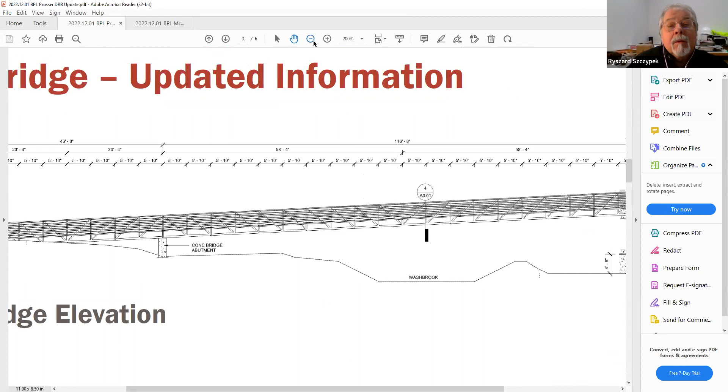They also asked about the bridge details. Let me go back to that previous slide.

One of the items that was asked for by the Inland Wetlands Commission was changing the topography of this area. According to the town engineer, they wanted to make sure we had two flood issues addressed. One is staying out of the floodway, defined by these heavy dotted lines — this is the western side, this is the eastern side. So we weren't having any obstructions here, but the town engineer also said our engineers needed to do an evaluation on flow.

So what they asked us to do is reconsider the topography that we had here. We were raising this side of the Riley parcel in order to minimize the ramp length, but because of their requirement to lower this topography, we have to extend the ramp length. So our strategy now is to bring this footbridge down to approximately here, where you can then continue either down a set of steps or a lower ramp, which would be handicapped accessible. The whole ramp is handicapped accessible, but because we need to make the transition from this previous elevation down to a lower elevation, we need to extend or provide this access ramp to the bottom of the footbridge.

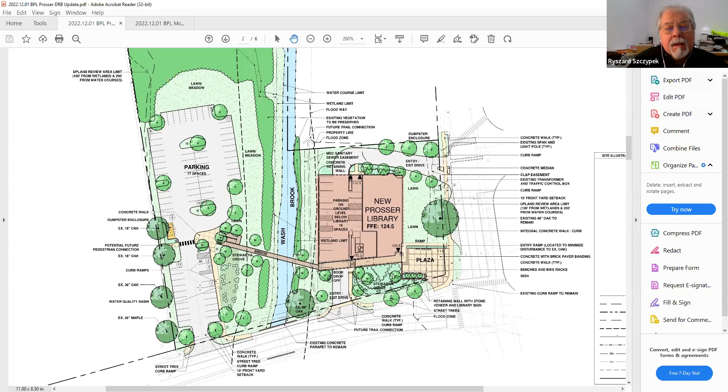Other questions asked by the design review board and also by wetlands were: what does this bridge look like? How is it built? So we've now included some details in this presentation. At the eastern end, where the bridge connects to the porch, that's the first floor elevation, then a gradual slope down to this location, and then the revised topography here, which we'll have to correct in a subsequent revision, and the access ramp on the other side of this footbridge.

We're introducing a concrete bridge abutment approximately here, which would be outside of the floodway. But what it does is reduce this span. Previously, we were spanning all the way from the building to the toe of the bridge without any support at all, which affects the cost. If we introduce a support at some point that does not occur in the floodway, that actually reduces the amount of structure required for the overall span.

So we've introduced that. The construction of this bridge is basically a steel structure, with railings on the side — steel members that will function as a balustrade on each side. The surface material is detailed as ipe planking, interspersed with some metal slip-resistant strips. So that's basically the details of that.

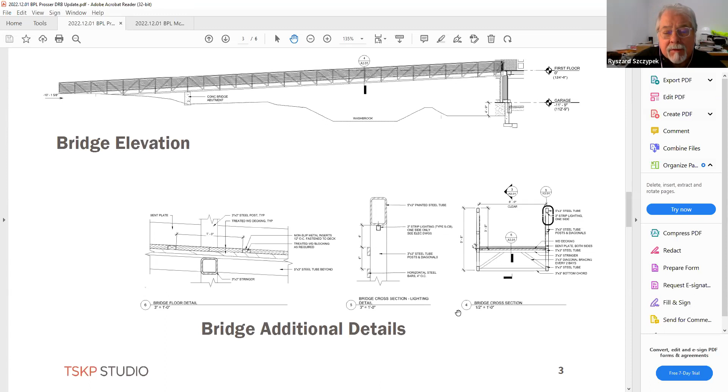It's important for bidders on the Prosser building, particularly the roofing subcontractor, to be aware that photovoltaic panels will eventually be on the roof, and that a coordination meeting is needed between the roofing subcontractor and the PPA vendor to ensure that any roof penetrations for conduit comply with the roofing manufacturer's and installer's systems. We don't want the roofing membrane warranty to be voided by the photovoltaic installation.

As soon as a PPA vendor is identified, we'd like to have coordination discussions with them to develop this further. But for bidding purposes, we want to put a note on our drawings saying this is a preliminary array, so roofing and structural contractors are aware the final layout may be adjusted depending on who the PPA vendor is.

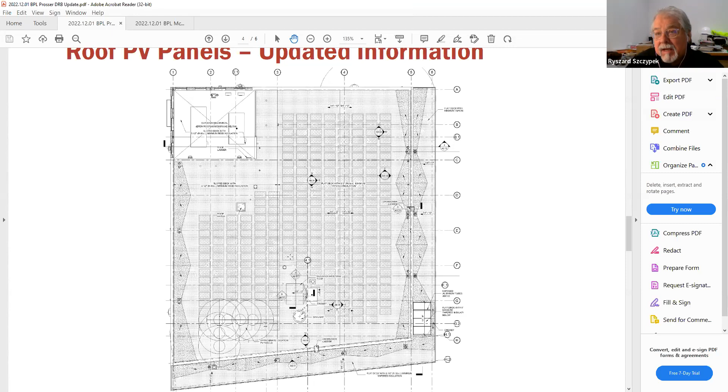This explains to the design review board where the photovoltaics will be placed. It'll be very low profile, and as far as we can tell, won't be visible from the surrounding areas.

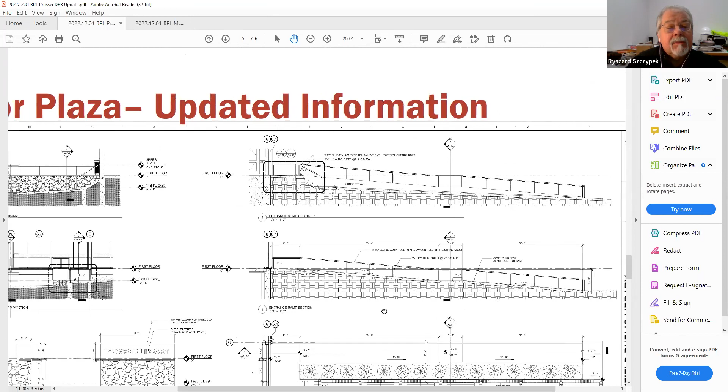We're also showing the ramp. This will have a similar lighting detail in the rail of that ramp to illuminate the incline walkway.

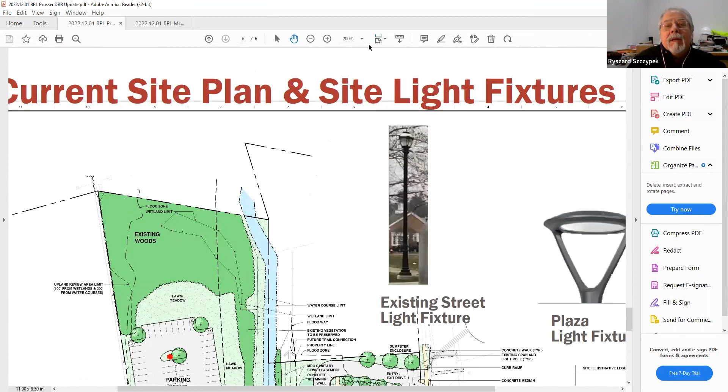People on the design review board couldn't comment on lighting because we didn't show them any lighting. So we're going to provide this diagram showing where the light fixtures will go and what they'll look like.

We need to illuminate the parking lot on the Riley site, and the walkway that leads from Mountain Avenue into the parking area. That area is also the entrance into the vestibule at the lowest level. We also need to illuminate the plaza in front, so there are some light fixtures and light poles proposed here.

We have these kinds of fixtures on poles located here, and light fixtures located on bollards. These are low bollards, maybe 36 or 42 inches high, to illuminate the walkway leading to the building. We also have taller poles to illuminate the parking lot, and these are what those parking lot light fixtures look like.

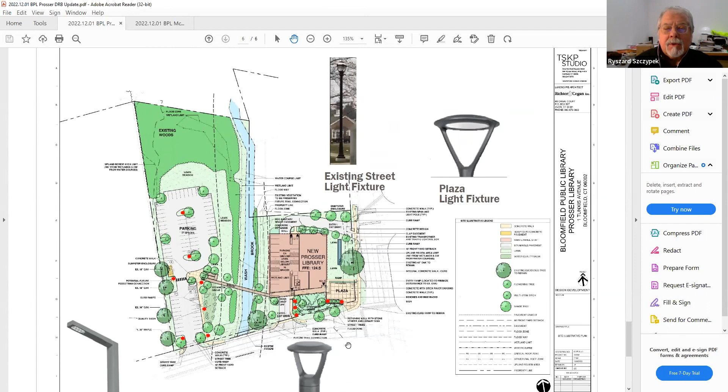When we were having conversations with the town engineer, he mentioned they're doing light fixtures in other areas of town, such as the town green and the streets alongside it. There happens to be a light pole located near the northeast corner of the Prosser site, and here's what it looks like—a much more traditional appearance. He asked if, as part of this project, that light fixture could be replaced.

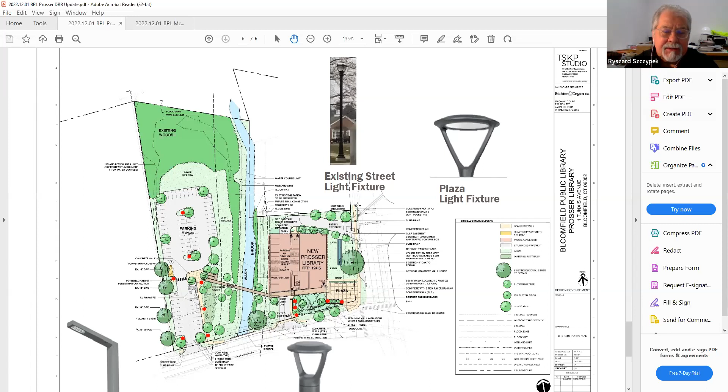I don't see why not. The light fixtures are actually furnished by Eversource—it's an item they stock and also service or maintain. The cost of that pole will actually be borne as part of the utility cost that the town regularly pays to Eversource.

I believe this might be the last slide. Any questions? Questions for Ryszard?

Lois asks: Ryszard, can you describe how kids will be prevented from falling off the bridge as they cross it?

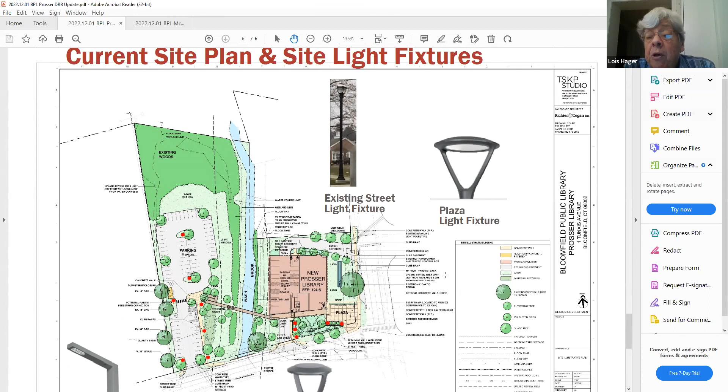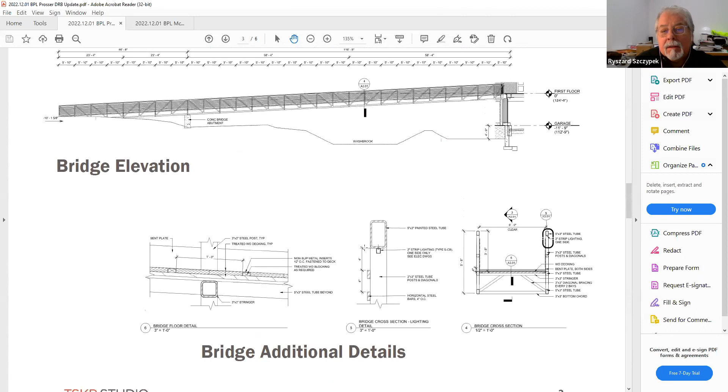Sure. The railing, I believe, is 42 inches high, or maybe even 48 inches. Let me go back—there's a dimension here. If I zoom in, there's a dimension of 3 feet 8 inches, which is 44 inches, sufficient to keep children on the bridge.

In the space on both sides, spanning from vertical strut to vertical strut, there would be a balustrade—horizontal bars installed 4 inches on center. So it's a very narrow opening, much smaller than a child's head could possibly fit through.

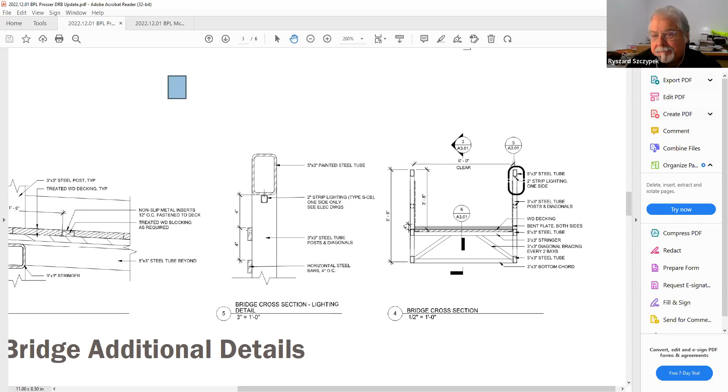I guess so. Okay, Patrick. Thank you, Mr. Chair. Thank you for this, Ryszard.

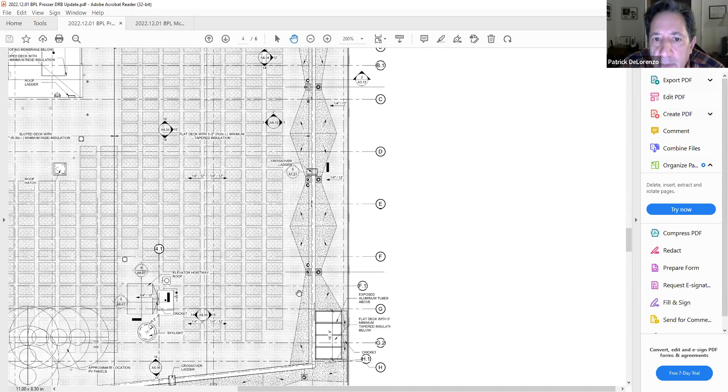I was wondering if there was discussion about the fixtures currently on the town green, and the consistency between the town green, Filley Park, and the library. They should all really be the same light fixtures. So that existing post there, is that the same light fixture that's in the town green and at Filley Park? I personally did not inspect the light fixtures on the town green, but according to the town engineer, Jonathan Tisi, this is the fixture that was used. Yeah, I mean, it does look like it.

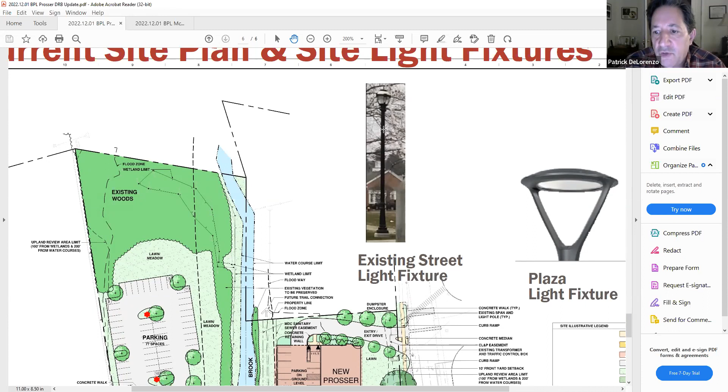So are you saying those are the fixtures that would be used, or are these other light fixtures what we're proposing on our plans and specs? This particular fixture, there's a light pole here, the street light that Jonathan Tisi would like us to have replaced and maybe make part of the project. That was the extent of the conversation regarding this style of light. So the design review board hasn't discussed the light fixtures yet? No, they want to know more about what we were proposing, so that's why I'm bringing this to tomorrow's design review board meeting.

Again, I don't want to belabor this, but we really shouldn't be using different light fixtures than the ones on the town green and Filley Park, which are all relatively new. We shouldn't be using a different set of fixtures here. So I would strongly suggest that the design review committee know that the lights being proposed are not the same.

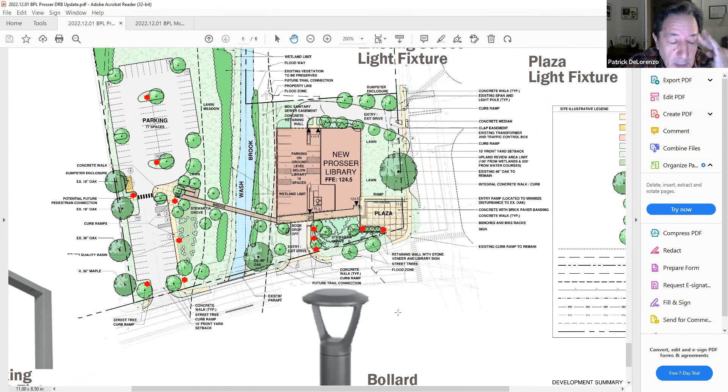I know next to nothing about this existing street light in terms of lamp efficiency and photometrics. Now, I could understand the bollards being a separate fixture because they're closer to the ground, providing lighting for the walkways. But the plaza lights and the parking lights, maybe the parking lights need to be brighter than these fixtures allow. I don't know that, but I just don't want to see different light fixtures all over the town center.

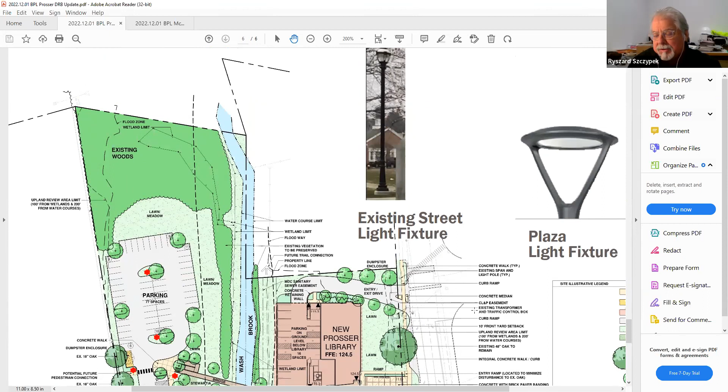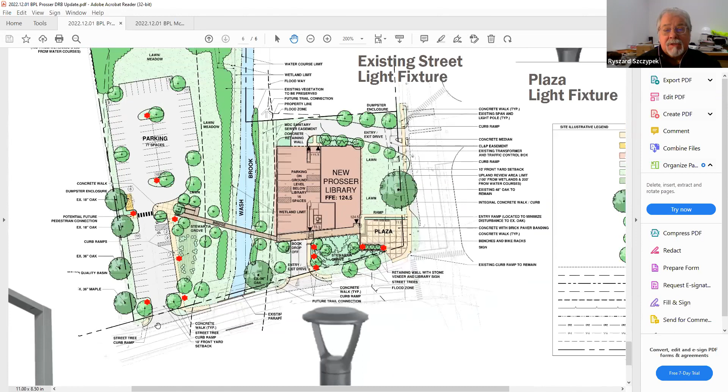This will be a subject of review not only at the design review board tomorrow, but also at the planning and zoning meeting. Planning and zoning requires a photometric analysis of light on the surface of the site, as well as any light spillage across the property line. They require that there's no light spillage. These fixtures we're proposing, which we've used most recently on a project in Mansfield, have full cutoff and do not have light spillage. We've used them before, and we're in the process of getting a photometric analysis to demonstrate that to planning and zoning.

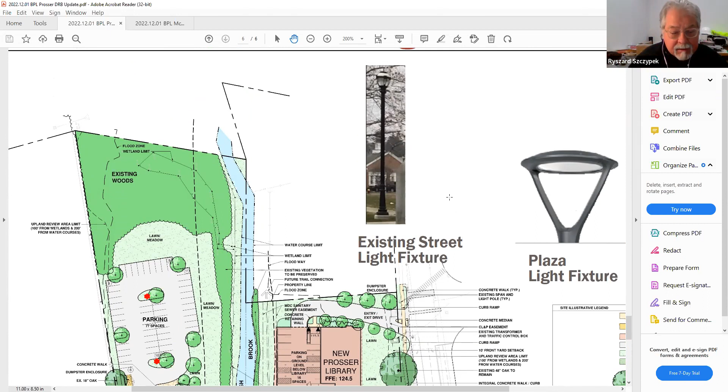I don't know about this existing streetlight. Maybe you can get that information from Jonathan. I did ask for that more technical information.

My other question is about right below that existing light fixture, right by the Prosser on the corner, there's that entry exit drive which currently exists today. However, it's only an exit, there's no entry into that drive, it's only exiting either left or right. Is this proposing that this be an entry drive now? I don't know how that would work with all of the intersections there.

It will be entry and exit. Is there going to be a traffic light that will guide that, because there are multiple intersections there? I don't know how somebody would be able to turn left to enter without a light. They will not be allowed to turn left. This is an exit that's right turn only. This was part of the traffic study done and the report submitted to planning and zoning. The recommendation for this location is entrance only in this direction and exit right turn only, so it's a two-way drive.

So the entry would only be from the right? That's correct. And the exit would be from the right? That's correct. Okay, well, that I could understand, because I know right now it's a do not enter, there's no entry into that, there's only an exit. That's good, because I was never in favor of having a driver be able to turn left out of that driveway.

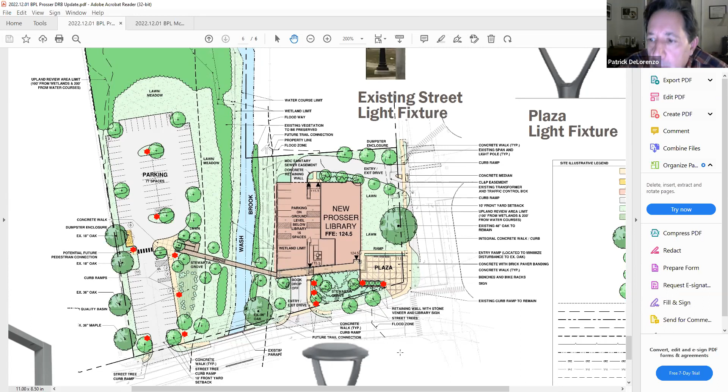Last thing, maybe you already mentioned this, but is the bridge going to have the ice warmer thing on it? So we want to discuss that. I think one of the items on Downs's agenda is alternates, and the heating element in the bridge could be designed as an alternate. If the committee wishes to get that design finished and priced, we can certainly do that.

And Downs can add it as an alternate. Okay, yeah, I thought it was on the alternate. Okay, thank you so much, I really appreciate it. You know, Patrick, I'm with you on your comments on the light fixtures.

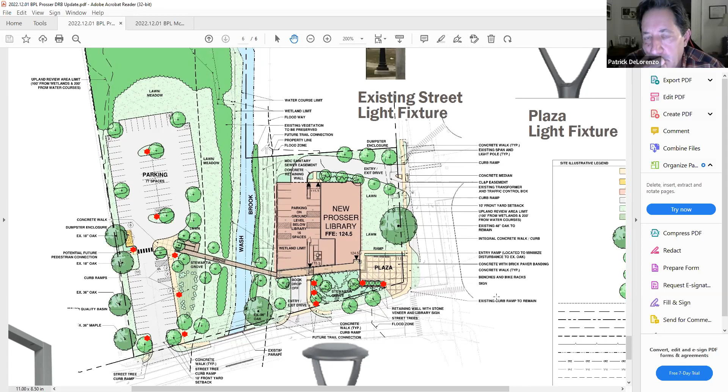But the other factor is that those existing street fixtures at the town green spill a tremendous amount of light out. They do. And so one of the criteria we're trying to do here in general is dark sky, don't spill light up into the sky. Right. So I don't have the answer, because I agree it'd be nice to be uniform.

Maybe, but maybe we break out the parking area as different and keep lights closer to the building as something more similar. I don't know what the answer is. I think we've already taken quite a bold step in making the building different.

So maybe there's some justification in keeping it consistent with the building. I'm just throwing out ideas, but I think the point is well taken, and it sounds like Ryszard's going to be looking into that some more. So I think it's unanswered.

Okay, good, because I know a lot of thought and time has gone into both the town green and the area directly in front of the town hall. I know they're not finished with the town green, and a lot of that was what was available from Eversource also, because they provided those poles and lights.

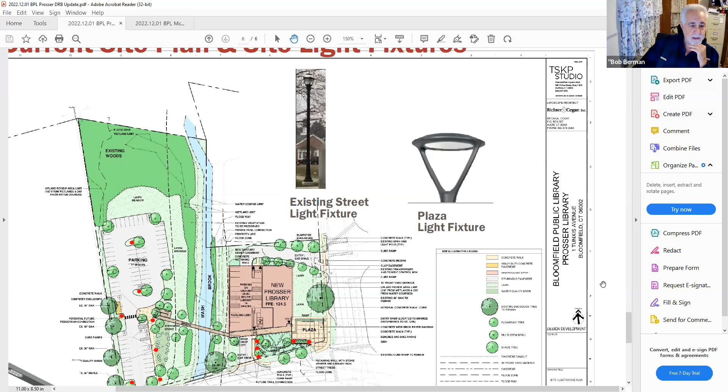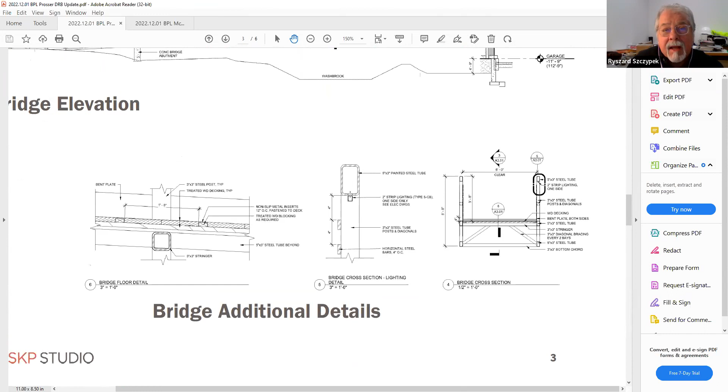And how would they get at that? Underneath, from the top? Yeah, so you'd get at it from underneath. The beauty of that kind of fixture is that it's exposed, not concealed - it's right there, but tiny. And the light source is within that fixture, you don't even see the bulb.

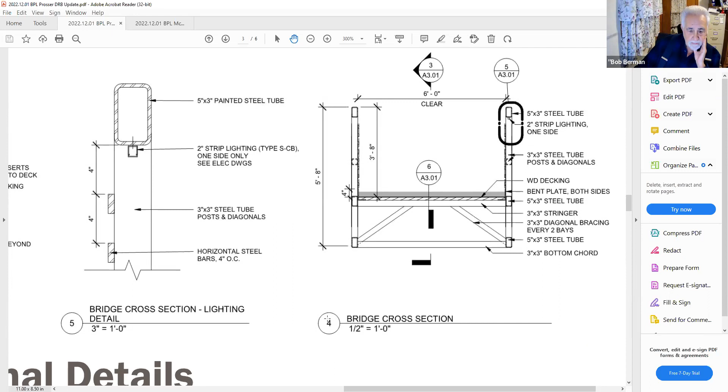And the light spills out and down, so it shines directly over the walking surface, but this is located right there within easy reach. Oh, okay, all right, so you get at it from the top. Yeah, that's what I was trying to figure out. All right, other questions for Richard?

Elizabeth? I had two questions. One might be more for the chair, and it's more procedural: when the design review board makes recommendations, are TSKP bound by them, or how does that process work? No, they are not bound by them. In fact, planning and zoning is not bound by the suggestions of the design review board either. They are merely suggestions.

So how does that work between TSKP's recommendations and the design review board's recommendations? Well, it just sounds like a lot of what the design review board suggested, Richard has made those adjustments, and I was wondering about that. I mean, we've given, in general, our architect license to design.

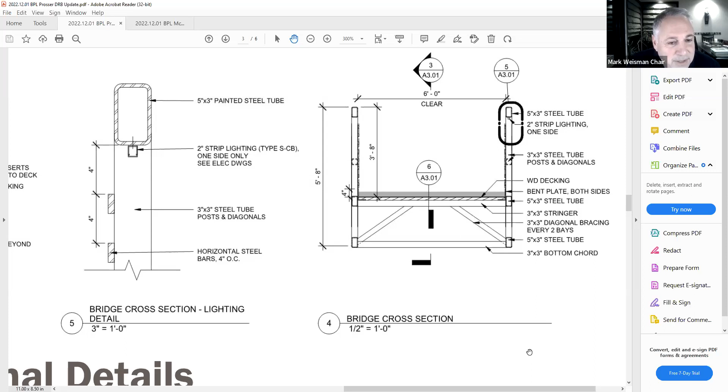So obviously he has taken the suggestions to heart in many cases here and gone along with them. And in other cases has not. Okay, so I wanted to make sure, that's what I thought.

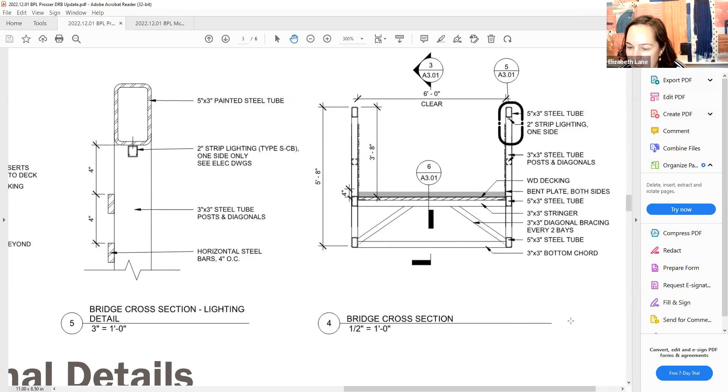I just wanted to verify that the architects are still taking artistic license when needed with those recommendations. And then my next question was about where will it say Prosser Library, and will those signs be lit? It would be ideal if, if it was up to me, it would be massively huge so that everybody knew. But I'm just curious where that will be and what look that will have.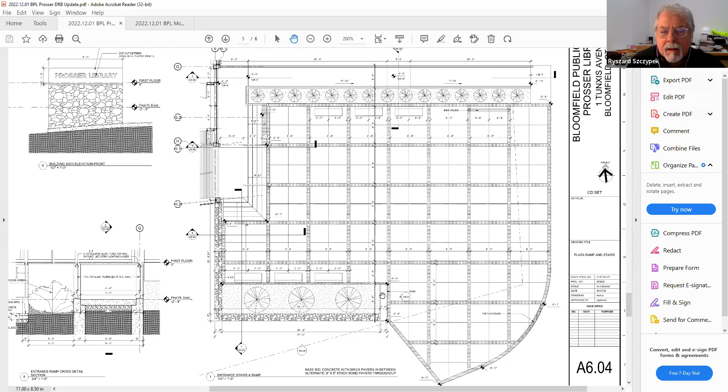I can show you, and I'm glad you brought it up. So here again is a view of the plaza at the entryway. There's an element located right here. Oh, and by the way, there are benches located here for the design review board's suggestion. There's an element located right here on the left side of the plaza as you approach the building. And what we're proposing is, there's also a retaining wall here because the slope of the site slopes down.

So we're trying to create a level surface. It'll be pitched to drain, but a fairly level surface for the plaza. And then a wall here. We're proposing a stone wall. We're proposing that this element, which is the end of the retaining wall, be also a stone structure, as you can see here. And on top of the stone structure is an illuminated item.

And it says Prosser Library on it. This element on top is about 12 inches high. The letters are probably about 8 inches high, and this is an 8-foot long signage element.

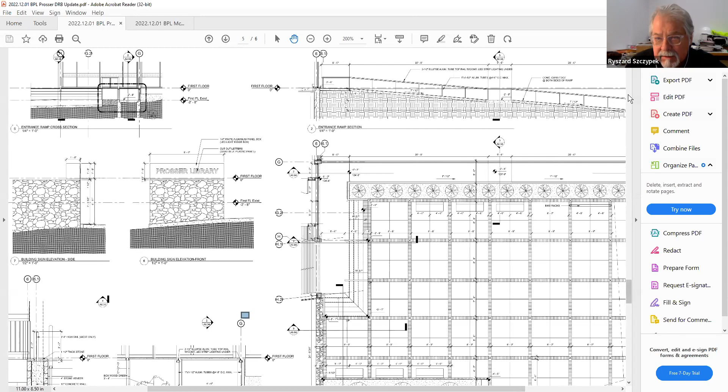And what direction does that face? It faces Tunxis Avenue. It could be illuminated on both sides, so that it could also face people who are approaching toward the east on Mountain Avenue. So that element is right here. I see, so it could be viewed from Mountain Avenue, and it could be viewed from Tunxis. It could also be viewed from Park. Yeah, that would be great if it could be seen from both sides.

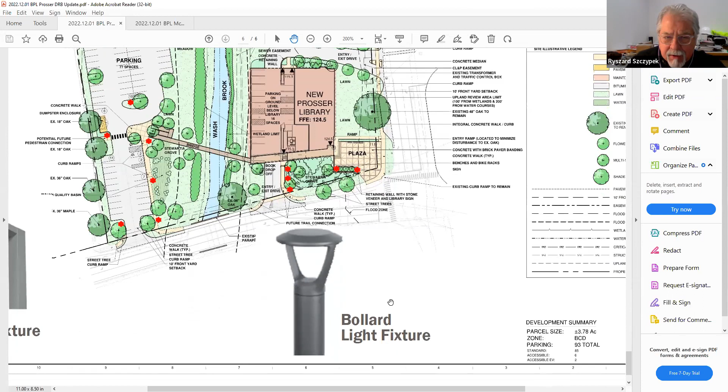Richard, is that similar to the earlier renderings? Even pre-referendum renderings had indicated a sign in that area. Do you recall, is this oriented basically the way it was shown there? I'm trying to remember. I believe so, I don't have those graphics here on my screen, but I think it was generally in that area. I believe that's correct.

I also have what we're proposing to show for McMahon, although I don't think it's on their agenda. I can share that with the committee if the committee wishes. Yeah, I mean, this is the first time we're really seeing this.

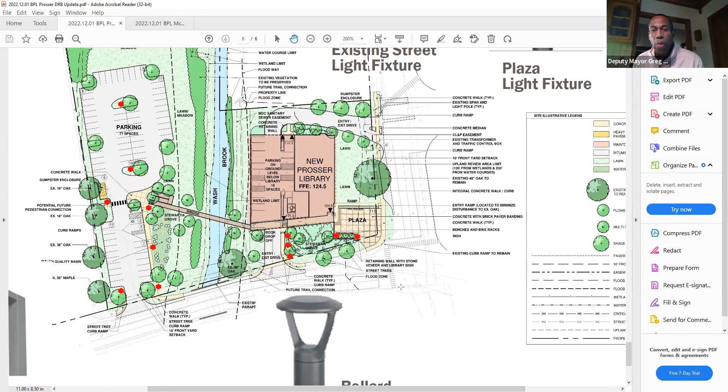Deputy Mayor Davis? Yeah, thank you. Richard, I wanted to ask, was there any thought to having illuminated signage on the inside the building up high so that you can see it when driving by and you can see it from blocks away? Like the Hartford Public Library downtown's got the HPL up high, it's really attractive and you can see it from all directions pretty much. Honestly, this is an element that Taisu designed, and I don't think he considered a sign at the top of the building, honestly. It wasn't in his vision. Yeah, okay, thanks.

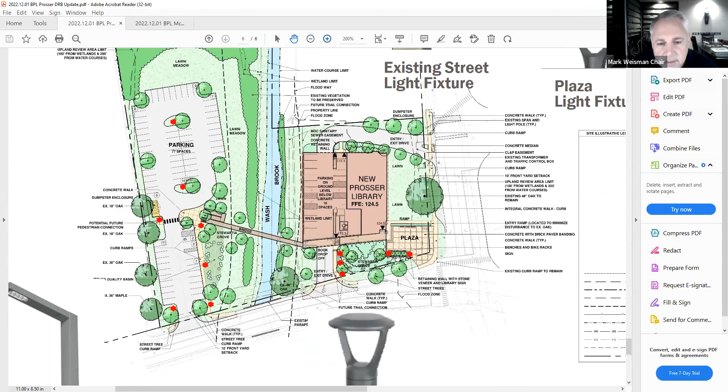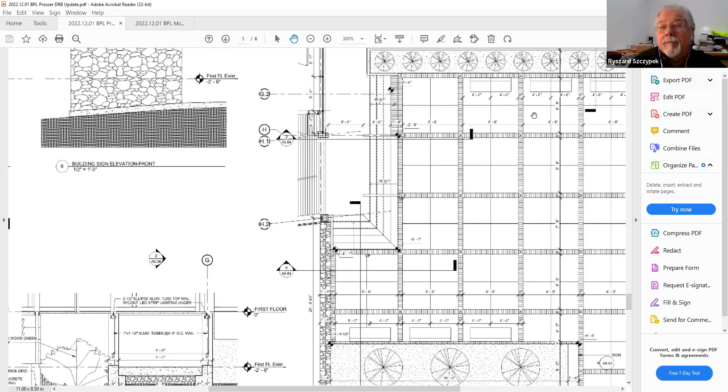Let's see, don't see any more hands. Richard, I see you pointed out some benches on the south side of the plaza. I see more benches on the north side of the plaza as well, is that correct? Yeah, let me see if I can get there. I see some lines there that look like the same as more benches there. Oh yes, right, right here. Okay, so we have a row of benches on that side as well. And then the species of trees looks like they've changed.

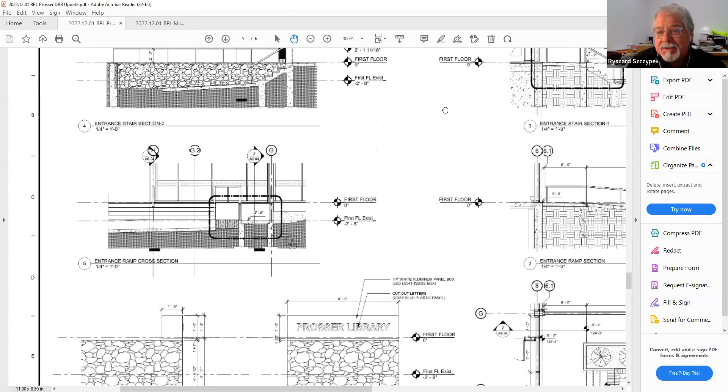Yes, so there were recommendations made by, I can't remember, Design Review Board or by Wetlands, or both. But yes, Richter and Cegan has listened, they have made those adjustments in the species of the proposed trees. Yeah, Stewartia Grove, is that what that says there, below to the south of the building?

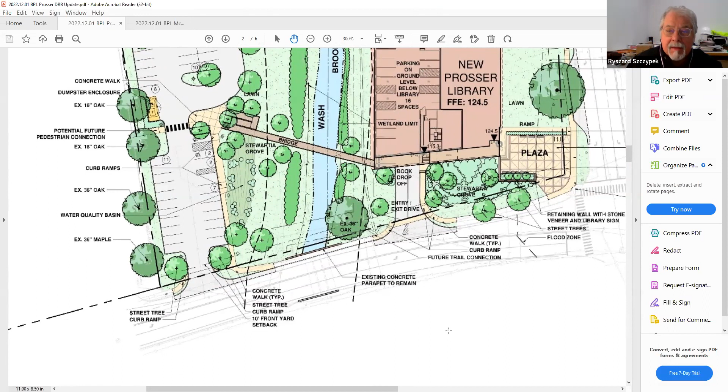Stewartia Grove, and the same across the Riley property. I believe that got momentum initially from the beautification committee. We've been talking to a lot of people.

So those species have changed in those areas. I think previously they were birch. Is that accurate? I believe they were river birch.

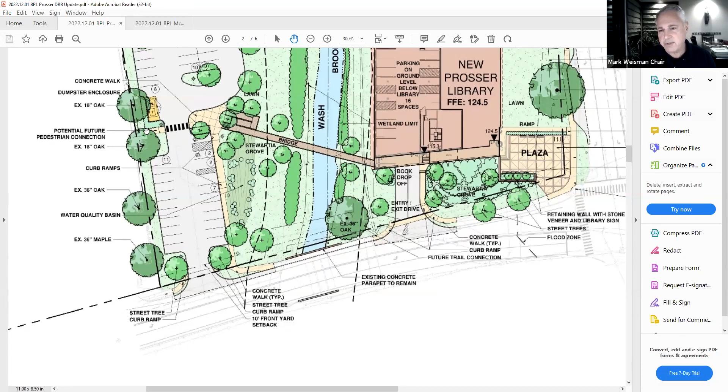Thank you for showing that potential future pedestrian connection here to the west, to the plaza. I think we need to do the same thing to the north, or at least be aware of how this connects across somebody else's property, but eventually to Filley Park. There's a neighboring parcel here, and beyond that is Filley Park.

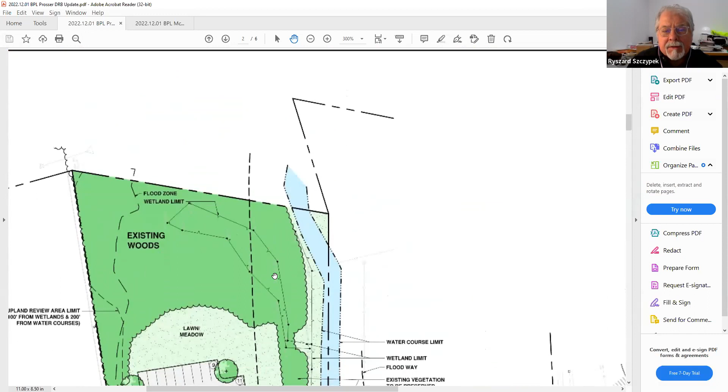There does need to be some sort of easement to get through this neighboring parcel. Yes, that is the intention. We need to know how we're eventually going to be doing that, because that ties in with Ty Sue's initial concept of the whole pedestrian connection all the way down from Filley Park and through the property, across the town green, all that.

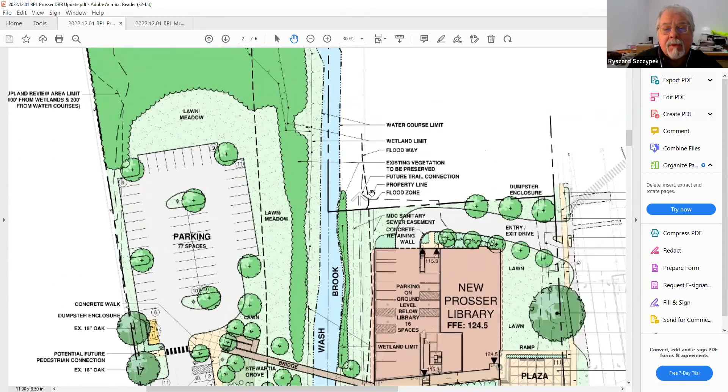Or maybe this is the neighboring parcel? No, you had it right the first time. That's actually a leg from the shopping plaza. Oh, okay, I see.

Can I just quickly show you McMahon? Absolutely.

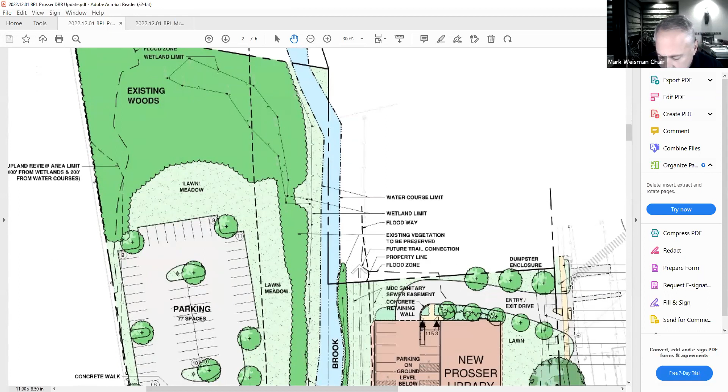Even though it's not on their agenda, we are going to bring this presentation forward as a PDF today for their use tomorrow.

One of the biggest changes here on this site is that you may recall there was a retention basin planned in this green area. That's been eliminated, so drainage will be accomplished with underground structures. It'll be sheet flow off the parking area, and I think this is a great improvement.

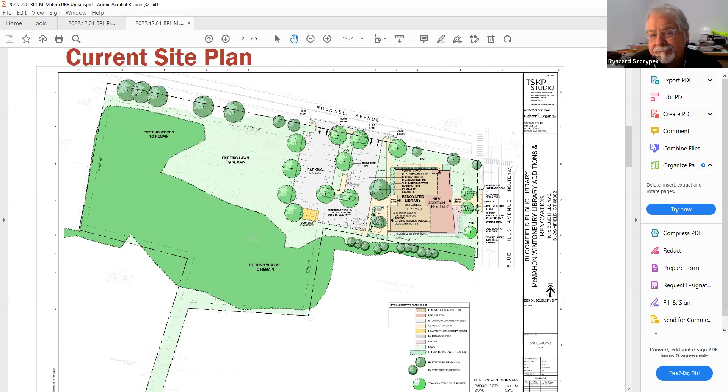Not much else has changed, other than the light fixtures. Again, we're proposing similar kinds of light fixtures for McMahon. Bollard light fixtures would be here and here to illuminate the walkways and approaches to the building, and parking lot light fixtures would be on poles to provide illumination of the parking lot. These fixtures are full cutoff because according to the rules, we can't have light pollution spilling out of the site or up toward the sky.

Any questions on McMahon? Lois: at some point we were discussing whether or not there would be room to have benches in front of the building. How was that resolved? I think we do have benches, and I do think they're incorporated into the building facade in this location.

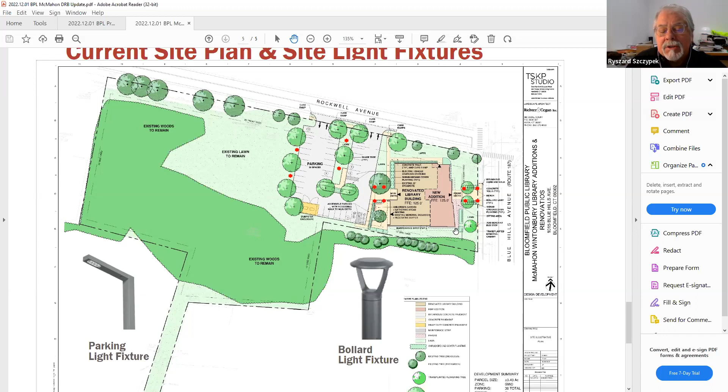Yes, it's illustrated here. There's an area for seating right at the building, and there's also benches out along the walkway. Okay, thank you — yeah, they're illustrated here. Any other questions?

We have our town engineer and Public Works Department to thank for these really great changes: elimination of the service drive, elimination of the detention basin. So it's all very positive — thanks to them again for getting involved and helping us out.

I don't see any other questions for Ryszard. Oh Nancy, I noticed Erica is in the attendees. She's showing up, so she can speak. Okay, thank you. All right, so let's go on to our construction manager.

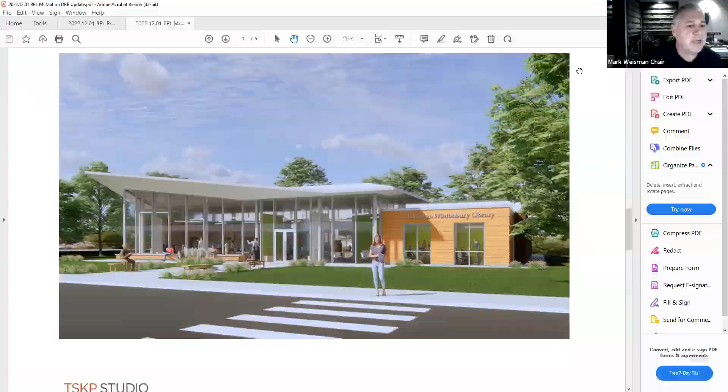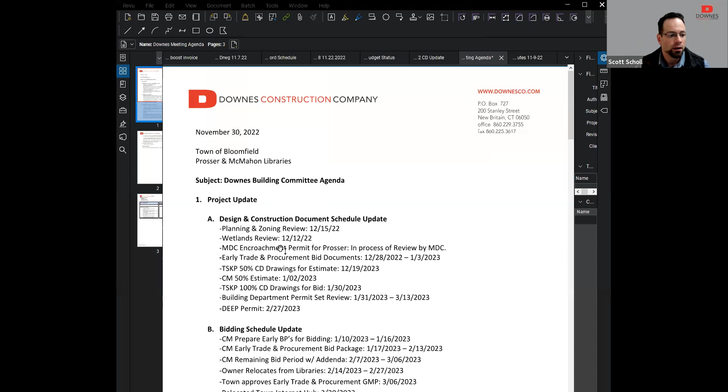We've got Scott and Kyle. Good evening, everyone. For our update, we're going to talk about schedule and reiterate the list of alternates and possible change made there for an alternate. In regards to the project update for the schedule, we are now past DD design into CD design.

The design team has some further reviews coming up for planning and zoning and wetlands in the middle of December. Currently the design team has submitted all their paperwork to MDC for the encroachment permit, and that is under review. We have possible early trade procurement documents that we're going to review for the end of December. 50% CD drawings for submission to start our estimate are due in the middle of December, the 19th, with the estimate following at the beginning of the new year.

And 100% CD construction documents, drawings ready for bid, are currently scheduled for January 30th of next year, along with the building permit set review, which will follow immediately after, and the DEEP permit still for the end of February.

For our bidding schedule update, we'll look to prepare any early packages or early procurement items for the second week of January, going into February with bid packages going out. The remainder of all the bid packages to go out to subcontractors for bid, with any addendum, will be for the entire month of February going into March.

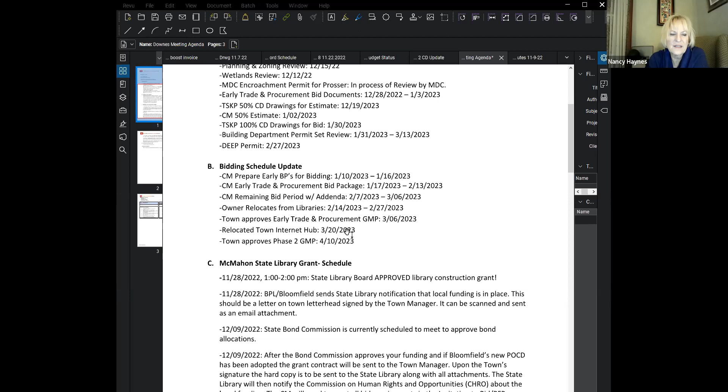Is that correct, Nancy? Kind of, yeah, CEN is a state agency, so yes. But they're working with the town's consultant, IT consultant, on that.

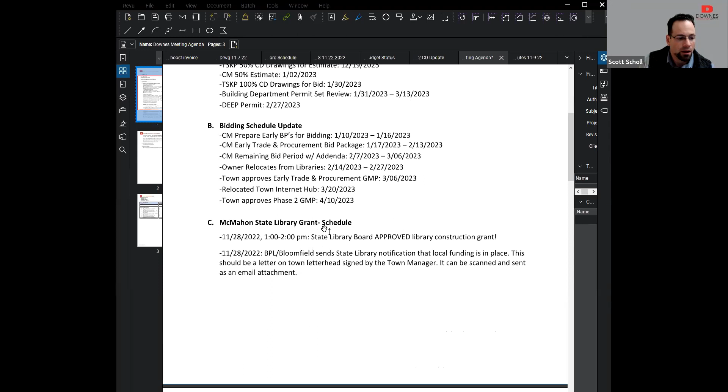Any questions on design schedule updates and bidding schedule updates before I move on? Yes, Bob Berman. Thank you, Mr. Chairman. When are you planning to go out for demolition bidding? It will most likely be the bid period of February 7th through March.

I don't know that we'll be able to do it for early January, but there might be some procurement items that we may have to address with the committee for that time. So we're talking about the month of February going out for demolition bids. Yeah, along with every other package. That says to me that demolition probably isn't going to start until April. Correct. Okay, alright, thank you.

Elizabeth: What does GMP stand for? It's our guaranteed maximum price to the town. So that's the construction manager guaranteeing the cost of construction, notwithstanding any change orders that happen during construction, based on the budget that's developed from the construction documents and the bids received.

Okay, I see. Thank you. You're welcome.

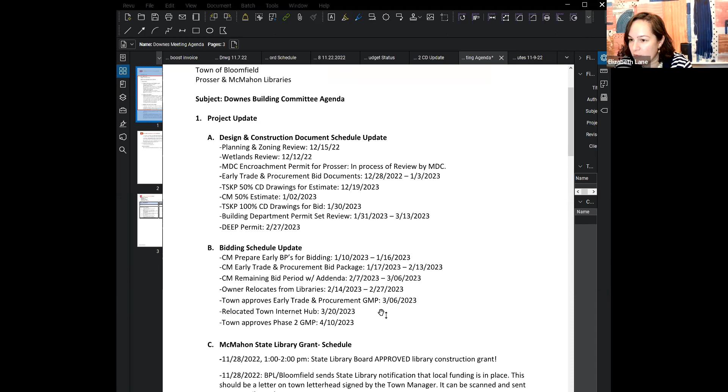So I think it would be prudent to address tentative opening dates when we are looking pretty good with CD documents, Elizabeth. Although our schedule does show a closeout date, those dates have been shifting since the summer, since this has started. So we really want to get to a point where we know we're going out to bid. At the moment, this is reflecting that. We just want to make sure we hit that before we start advertising things of that importance. And I know that's important, believe me.

And as far as the ground breaking goes, that can start a couple weeks before construction. We're pretty good about putting those together and getting everyone who needs to be there, and we can certainly coordinate that with you as well.

So would that be more of a late spring thing? The groundbreaking? Yes, I think it's definitely April. I think we want to know the GMP is approved and we can pull the trigger and get it going. But yeah, could be mid-spring. It could be happening not long, a couple weeks right after that date. But yeah, mid-spring.

We could decide whether it occurs prior to demolition or at the conclusion of demolition, depending on how you want to look at it. We've done it both ways. I know a lot of clients like to do it before the shovel really goes in the ground, they want to be the first shovel, but some people are different. Sometimes it depends on the weather and how you need to hit the ground running. But we'll definitely come to a determination with everybody and talk about that. Yeah, it's really important.

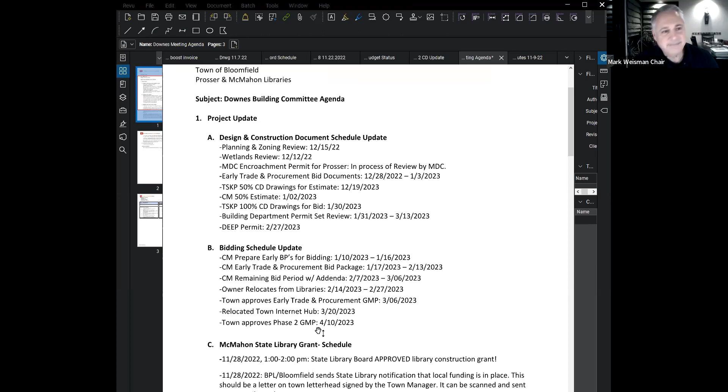All right, hold that thought, Bob, please. All right, listen, Scott, I'll let you continue on with your other items here. Okay, I think Lois has her hand up. I just saw it. Go ahead, Lois. I was just going to react to the sledgehammer. Some people will not be happy to see their old library being taken down.

So I think it's going to be on all sides, so let's be careful. Thanks, Lois.

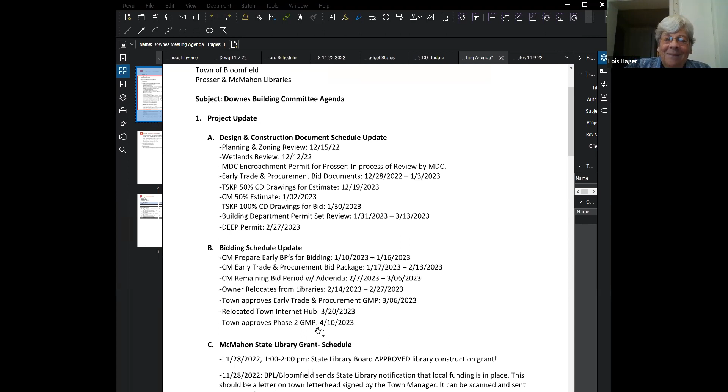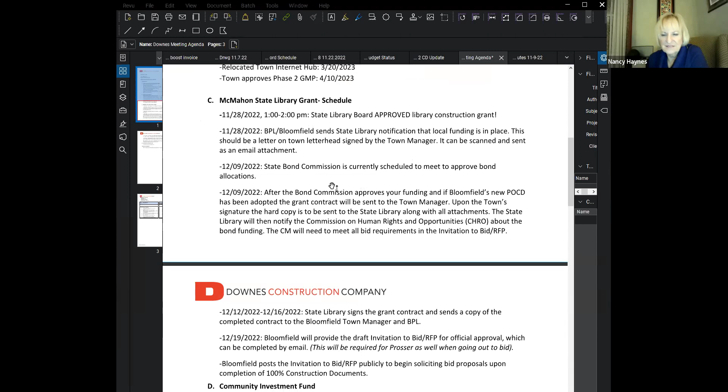All right, Patrick has his hand up. Yeah, sorry, Mr. Chair, real quick. I just noticed right here, Scott, where you talk about the relocated town internet hub. Could you just tell me, does the Prosser have its own separate internet hub? I would think the internet hub is within town hall. No, the internet hub for the entire town, the center of town, is located at Prosser. Oh, well, I didn't know that. That's interesting. It serves several buildings.

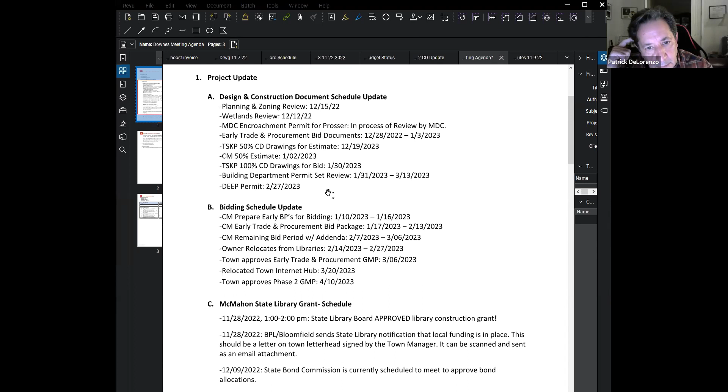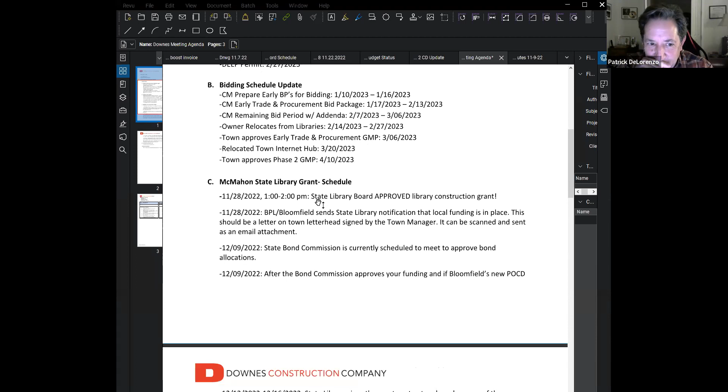Okay, so where's that going? It will go over to town hall. Town hall, okay, all right, thank you, that makes sense. And that's a permanent move, not temporary, correct. That's good. So Patrick, like, we will not take any sledgehammers to the building until that is properly moved. All right, we appreciate that. That's good. Thank you for that. You're welcome.

So item C gets into the McMahon State Library grant schedule. As of this week, that's been approved, and congratulations to all of you and your hard work to the library staff. So I might need a few updates myself here if anyone wants to chime in, but I'm going by the email that was sent that Elizabeth had presented from the State Library grant. So this week, it looks, actually for the 28th, that the town was to send notification that local funding is in place. This should be a letter on town letterhead signed by the town manager, scanned and sent as an email attachment. So I don't know if anyone can comment on that, if that has been completed.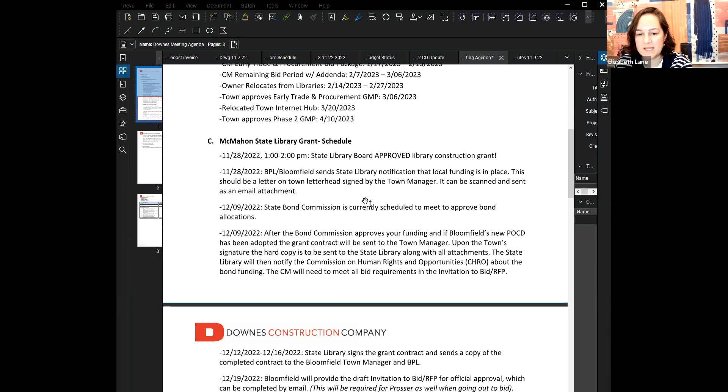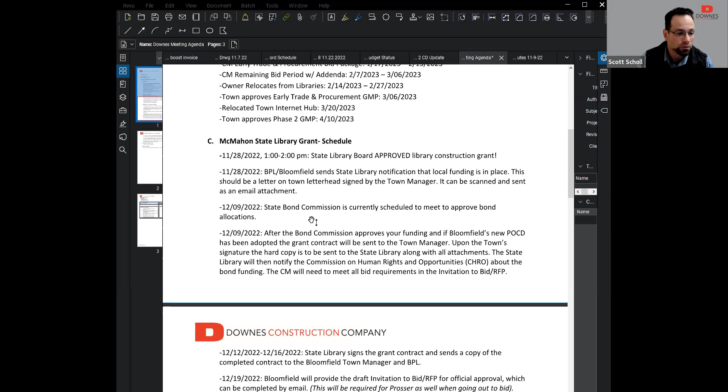I believe we already did that. Okay, I need to double check with the state library that what we submitted was still good to go, but we needed to do that also in order to make sure we made it on the bond schedule. Okay, so as long as that's been done, that triggers the commission on the 9th to move forward and approve the allocation of the grant. After that allocation for the fund has been approved, then the town is sending a hard copy with all the attachments for notifying CHRO. So these are all the requirements that were done with Prosser that would just follow suit, just like Prosser, except for McMahon.

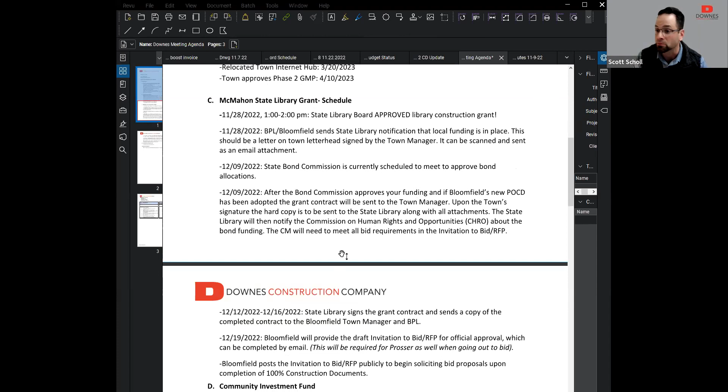Also in mid-December, if all goes well at the bond commission meeting, between the 12th and the 16th, the state library will sign the grant and send a copy of the completed contract to the town manager of Bloomfield. By that time, it'll be a little early based on the schedule we have, providing a draft invitation to bid and RFP. I think we'll have a little time on that, but that's something we have to put together, as well as the advertisement for the state library grants review, and we have to do that for both Prosser and McMahon.

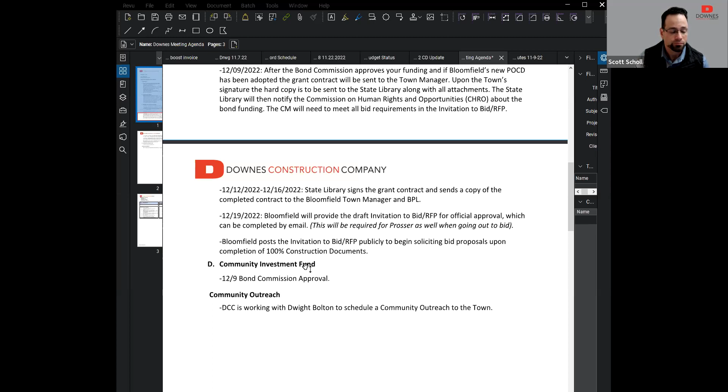We'll have that available once we've gone through the CD documents, and I see that happening more in January. Once they approve how that all looks, our invitation to bid and advertisement will lead us to publicly advertising and soliciting for the bid on the DAS websites, the newspapers, and all the avenues of advertising we typically do, but also what the grant stipulates. Moving into the Community Investment Fund, also what they stipulate in their statutes, which we have, and that is also up for commission approval on the 9th of December, from what I understand.

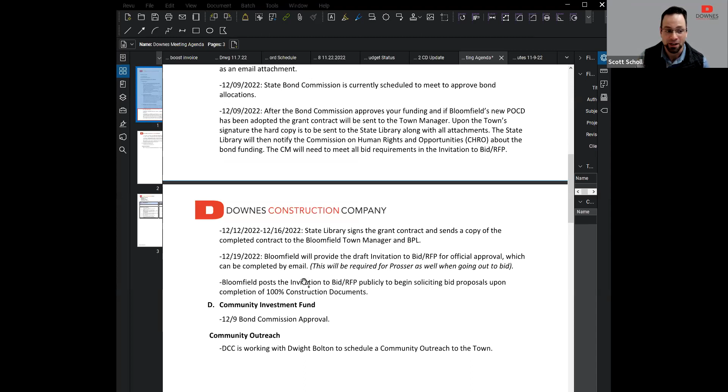So any questions or comments on the grants? I see some hands. I'll let Mark go, or Lois.

Lois: I continue to be concerned when I see that it says our new POCD needs to have been approved. As far as I know, nobody's even working on it yet. I'm going with Elizabeth's comments that we have been given an extension, or some kind of reassurance, that if our plan of development is not done, we will be going with the old one. But this says the new one has to be enforced and adopted. So could we please clarify that? Because it could be a serious problem.

Lois, if I could semi-answer your question, the CIF required that as well, and we got a waiver for the CIF part. So the state is accepting waivers in the meantime, and I do believe the POCD kickoff starts today or tomorrow. So the town has selected somebody to do that work. Obviously there's been a delay because of the changeover in staff in the building and land use departments, but that is moving forward. However, that's a 9-month to a year process.

Exactly. And the state does provide for any grant that a municipality submits, we would have to get a waiver on a project-by-project basis. But we have no doubt that we will get the waiver. We've gotten them for all the grants that we've submitted, in addition to ones for the library. We've submitted grants for other things in the meantime, and we've gotten OPM's waiver for each of those. It's probably easier now that they're actually working on it to get the waiver.